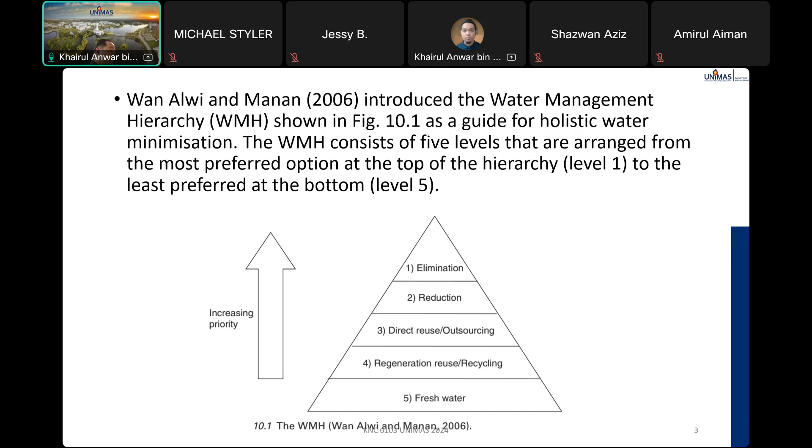The elimination is not to eliminate the water, but to substitute it with something else. For example, instead of using water, we can replace it with air. That means the source, even though source elimination is the ultimate goal, possibly we want to replace water with other type of media. Often it's not possible to eliminate water completely.

So that's why we also have the hierarchy. Attempts should be made to reduce the amount of water at the source of water usage. Such a measure is called source reduction. It's the second best option in the WMH. So we reduce the amount of water usage. To reduce the amount of water usage, that's why we try this method, water analysis.

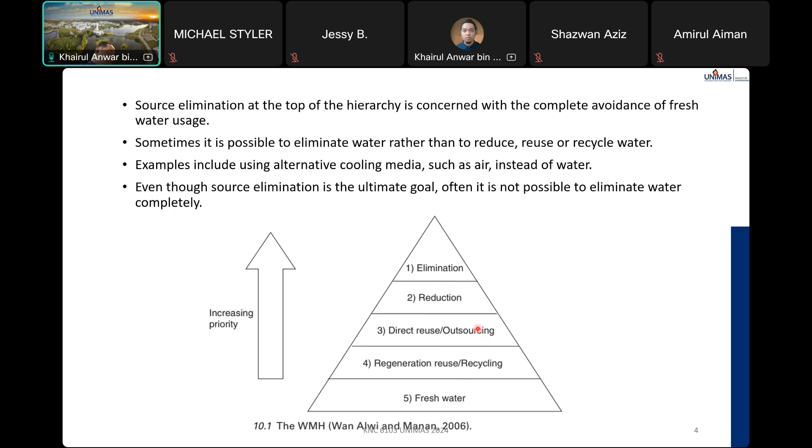Regeneration refers to partial treatment of wastewater or even external water source to match the quality of water required. There are two possible cases for regeneration. We have regeneration recycling, the reuse of treated water in the same equipment or process. If you want to reuse the water again from process one, then you need regeneration recycling.

Regeneration reuse involves reuse of treated water in other equipment. So for regeneration reuse, meaning treat the water from process one, channel it to process two or another process which can accept that contaminated water. How to know the water is enough? When the use is possible for that process. We'll have more discussion, maybe not today. Today we just introduce. So the last level,

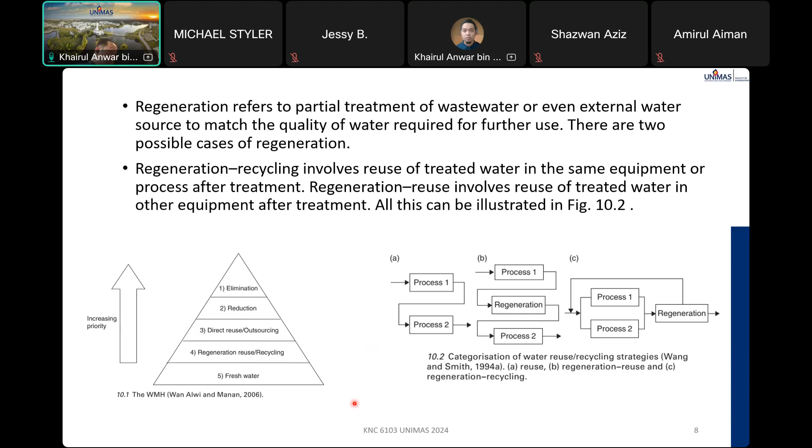fresh water usage, level 5, should only be considered when wastewater cannot be recycled or reused, or when wastewater needs to be diluted to obtain a desired purity. So meaning we mix the contaminated water with fresh water to dilute it, then channel it to another process. The wastewater has to undergo end-of-pipe treatment before discharge to meet the guideline. The use of fresh water is the least desirable option from a water minimization point of view.

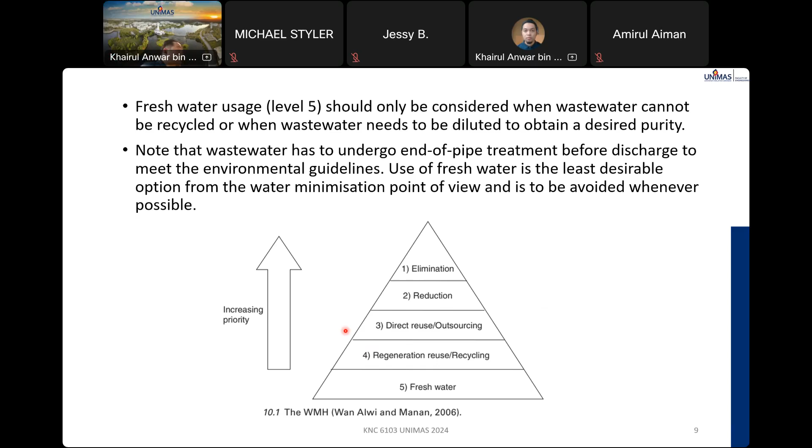So the water footprint concept, and this is related to the pyramid just now of the management hierarchy, expresses the measure of how much fresh water is used during the life cycle of a product. The water footprint consists of elements, page 2 of the paper.

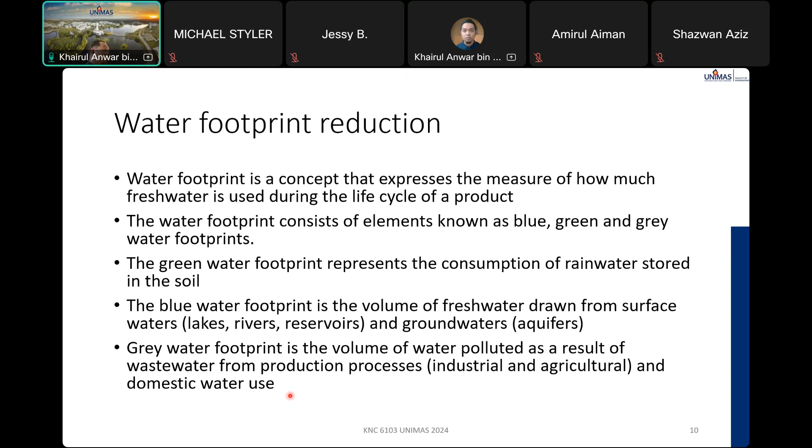This is found in the recent paper. Although their application is for industry, it can be used for other types of industry as well.

And the gray water footprint is using this water flow rate within the facility. So why they choose COD? Because we have many, right? We have pH, COD, yes. They choose COD normally because COD represents the typical contaminant within the wastewater, because wastewater normally consists of many types of contaminant. So one way to look for the contaminant is accounted for by measuring the COD. This one chooses COD.

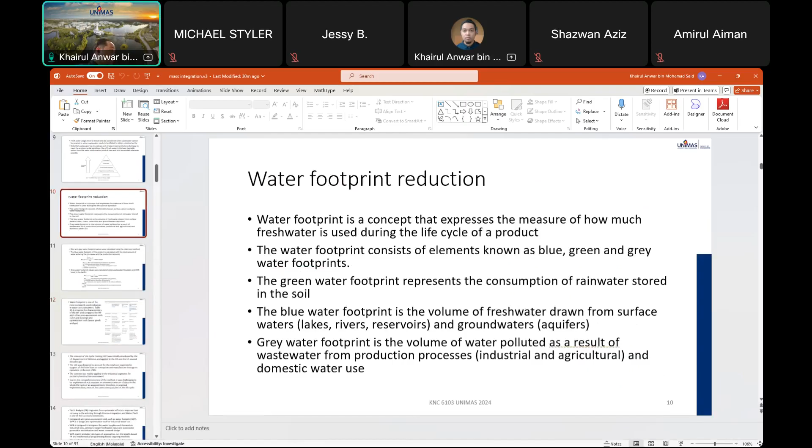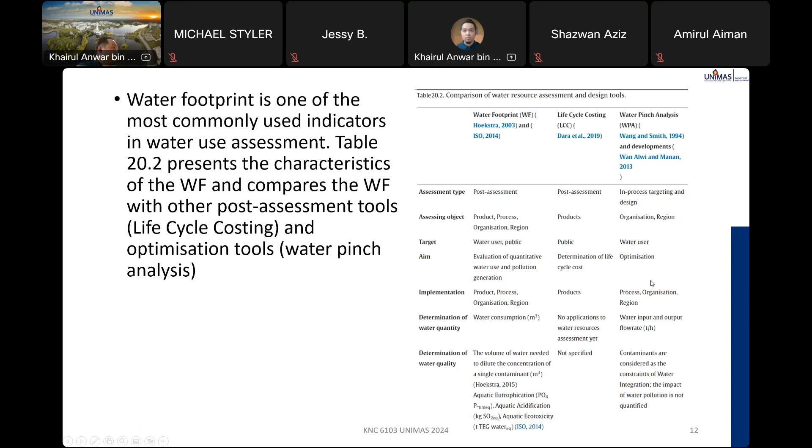Well, this is all the comparison. Go to the book for the complete comparison. The final row should be for limitation. Limitation of water footprint, WF: count only the input and output, not water used within the process.

Life cycle costing, the limitation is it has not been applied to resource assessment. For water pinch analysis, it's challenging to consider multiple contaminants. Yeah. For multiple contaminants it is very hard to do water pinch analysis. Natural water is not considered in there. So the concept is still two.

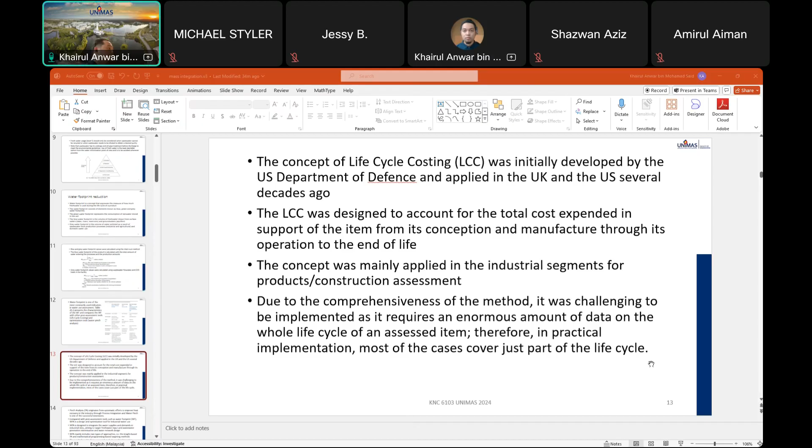The concept of life cycle costing was developed several decades ago, actually in 1981. Life cycle costing at the moment, I think the newest term, they combine it with life cycle analysis. Before that, it's life cycle costing.

So the LCC was designed to account for the total cost expended in support. The concept was mainly applied in the industrial segment. So due to the comprehensiveness, it was challenging to be implemented, requiring continuous data over the life cycle of the assessed item. Therefore, in practical implementation, most of the cases cover just part of it.

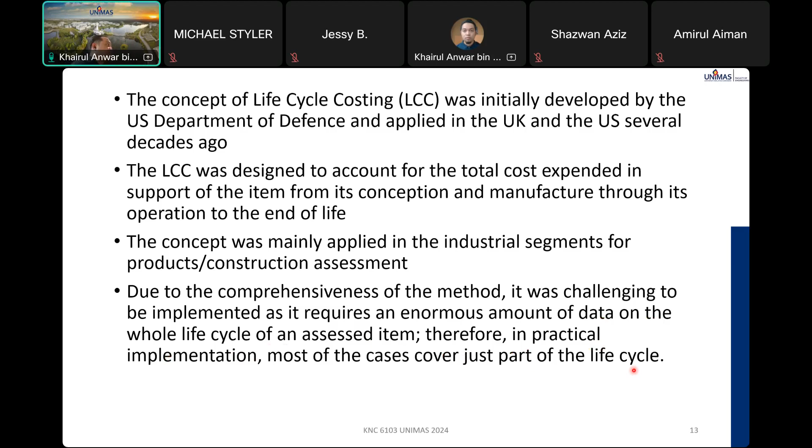This is for pinch analysis. So number 1. Still in book 2, chapter 20. If you have the chapter downloaded, you can refer to page 605.

So pinch analysis originated from systematic efforts to improve recovery in industry through process integration. The first pinch analysis is actually for heat recovery, what our Dr. Farid is discussing. And water pinch is one of the most successful extensions, based on pinch analysis for heat recovery. The person responsible for water pinch, Professor Wang and

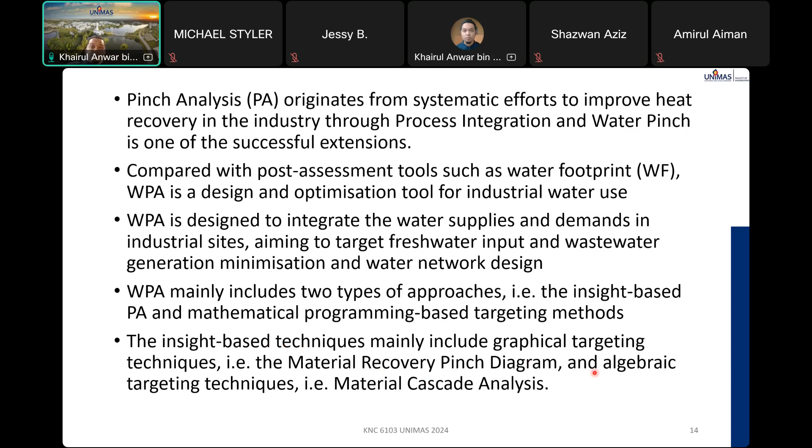The insight-based technique mainly includes graphical targeting technique, this material recovery pinch diagram. Material recovery pinch diagram is developed by Professor El-Halwagi. And algebraic targeting technique, material cascade analysis. Widespread studies have also been conducted on the topic of mathematical programming targeting.

Okay. Now I'm going to page 606. A typical water pinch analysis solution is two steps: setting the water target, followed by network design to achieve the target. So in the work of Wang and Smith, the first paper, it's very long, 26 pages, because they cover single contaminant and multiple contaminant. Although today we cover single contaminant first, we can go for multiple contaminant as well.

In the work of Wang and Smith, the target of using fresh water, maximizing water reuse and water regeneration are discussed, and both single and multiple contaminant are addressed. So a composite curve used to represent the water using process can identify the bottleneck in real processes. And the conceptual framework can help specify the optimal type of regenerator and regenerator specification. So their work serves as one of the earliest contributions of graphical method for water minimization study using WPA.

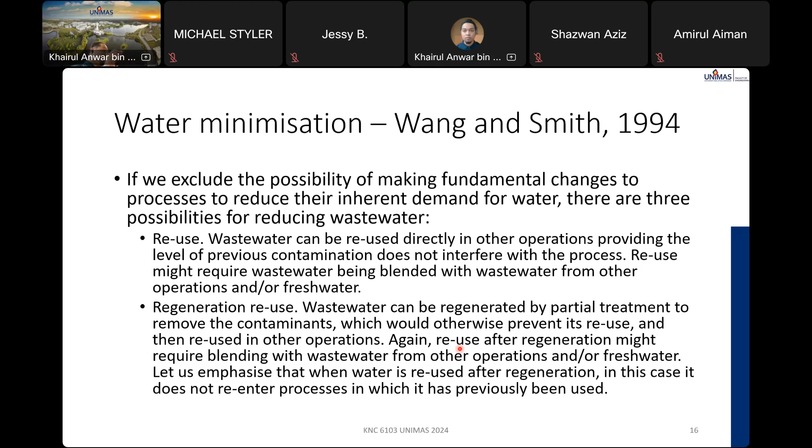So let us emphasize that when water is reused after regeneration, in this case, it does not re-enter processes it has been used in. In order to use the wastewater again for the same process, you need to do regeneration recycling. Wastewater can be regenerated to remove contaminants which have built up, and then the water recycled. In this case, water re-enters processes in which it has previously been used. So it is important to distinguish between these three cases. In some cases, recycling between operations might be allowed. In other cases, it might not be allowed due to the build-up of contaminant not removed in the regeneration.

So how to regenerate it? Method: can filter it, can use membrane to filter, activated carbon, trap, strip.

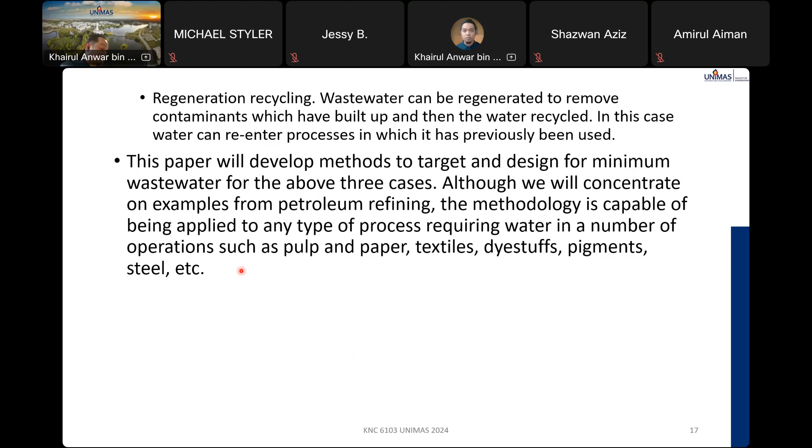This paper referred to Wang and Smith before. So this paper will develop a method to target and design for minimum wastewater for the above three cases. Although we will concentrate on an example from petroleum refining, the methodology is capable of being applied to any type of process requiring water, such as pulp, textile, etc. So when you read this paper, the example is based on petroleum. Still the paper, this is the subchapter, page 982: targeting minimum wastewater for single contaminant. For water pinch analysis, we have five steps.

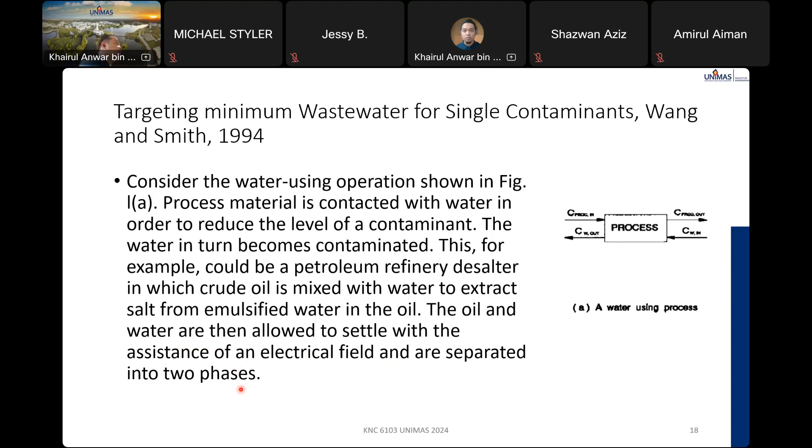Figure 1B shows a representation of this process in terms of concentration of contaminant versus mass of contaminant transfer. In the example of the desalter, let's say it's a desalter, so the contaminant would be salt, because the water will mix with the incoming crude oil plus salt. Contaminant is salt. Figure 1B shows one possible combination of inlet and outlet concentration of water to satisfy the mass requirement. Specifying the inlet and outlet concentration of water and the mass of contaminant transport also specifies the water flow.

So the information here, M is flow rate in kg per hour. Normally either in gram per liter or ppm. So this data is actually from the process or the mass balance.

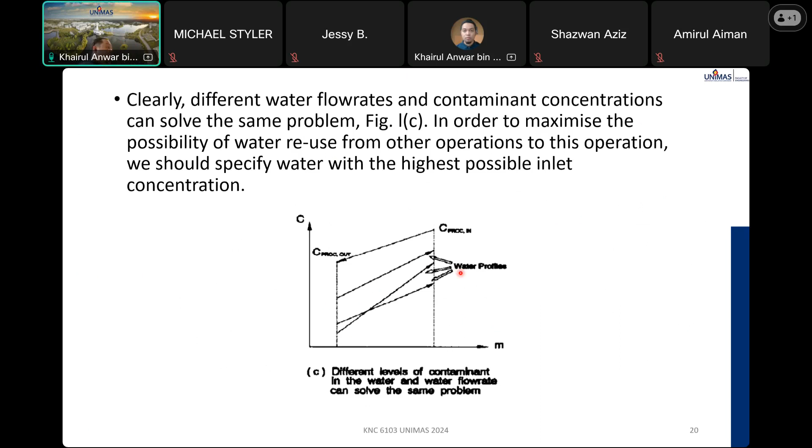This one is page 2 of the paper, second column. Then specifying the maximum possible outlet concentration, minimize the water flow rate at the maximum inlet concentration, figure 1D.

This water profile shown in figure 1D will not necessarily be the profile we will use in the final design. So in this case, we come up with a limiting water profile, meaning this is the minimum water quality for that process. So meaning the incoming water profile must be less than this limiting water profile. It simply represents a limiting case. We will therefore designate this to be the limiting water profile.

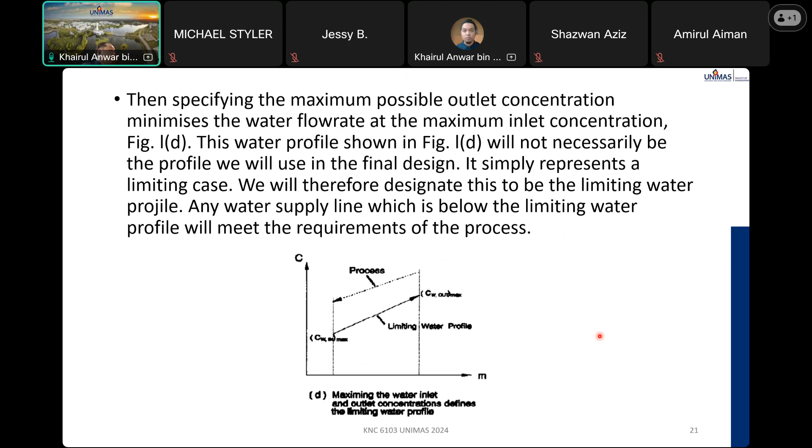So figure 1E shows two examples of different water supply lines which will satisfy the process requirement. In this case, one is fresh water here, below the profile. The second line here is actually from a different process, that's why the inlet concentration is contaminated, but still below the threshold. So the threshold here is the limiting water profile.

So how to determine the limiting water profile? That one we need to do the pinch analysis. The maximum inlet and outlet concentration for the limiting water profile will be fixed by a number of possible considerations.

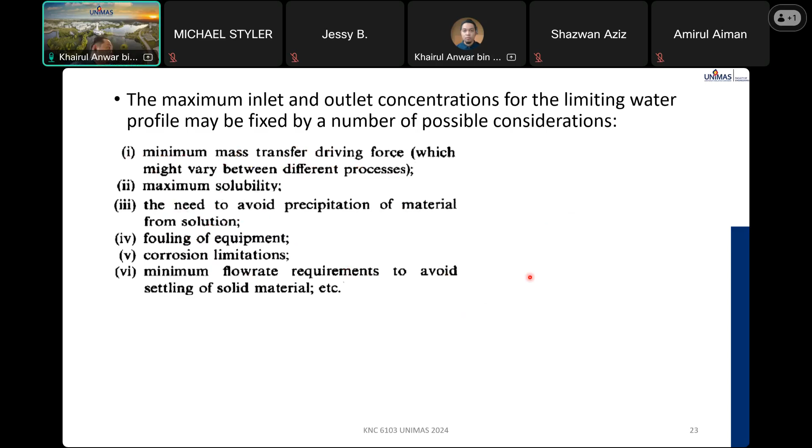So in the same paper, the author provides an example of limiting composite curve, how to determine the pinch point. Page 3.

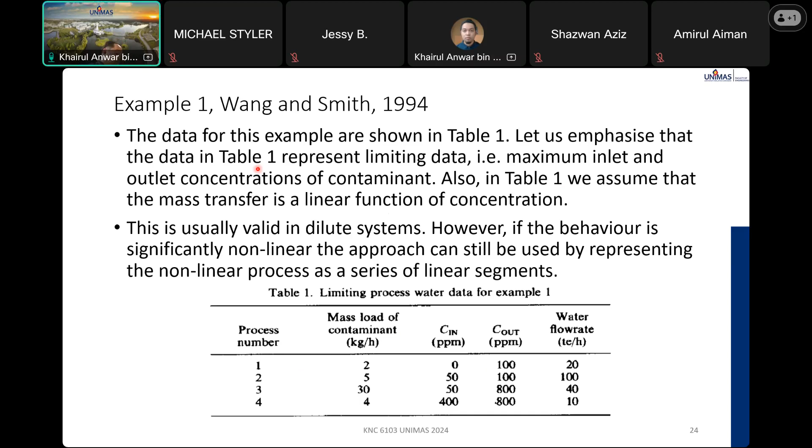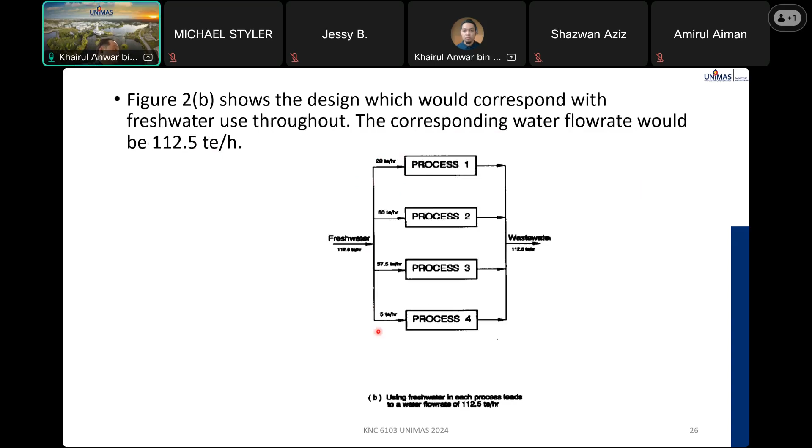So this one is 50 divided by 800 times 40, then 40 minus that value. 50 over 800 times 40 is 2.5. So 40 minus 2.5 is 37.5.

The freshwater usage is 112.5 ton per hour. This is before water pinch.

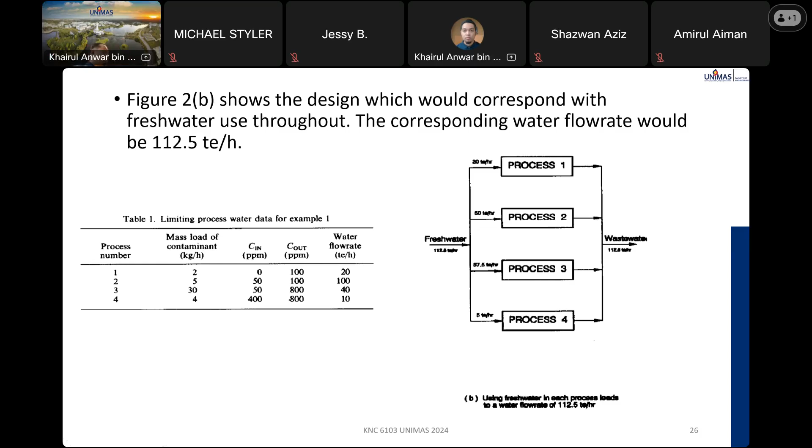Page 4, paper number 1, is the pinch.

We are to minimize the flow rate overall, must analyze using processes behave in an overall sense. For this, we can construct a limiting composite curve as shown in figure 3. This is a limiting composite curve.

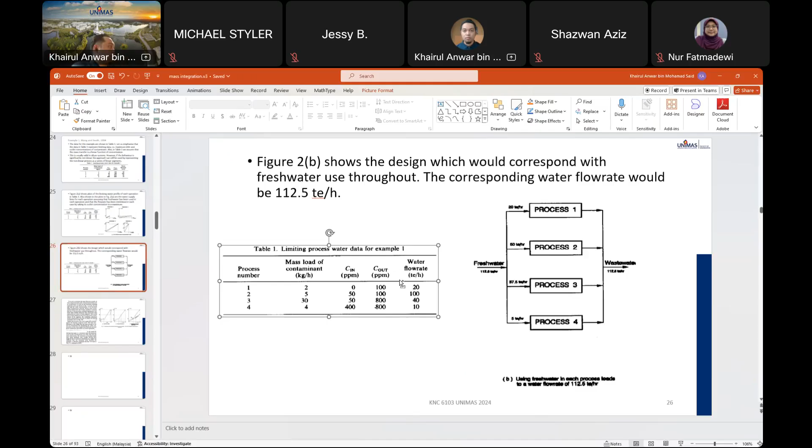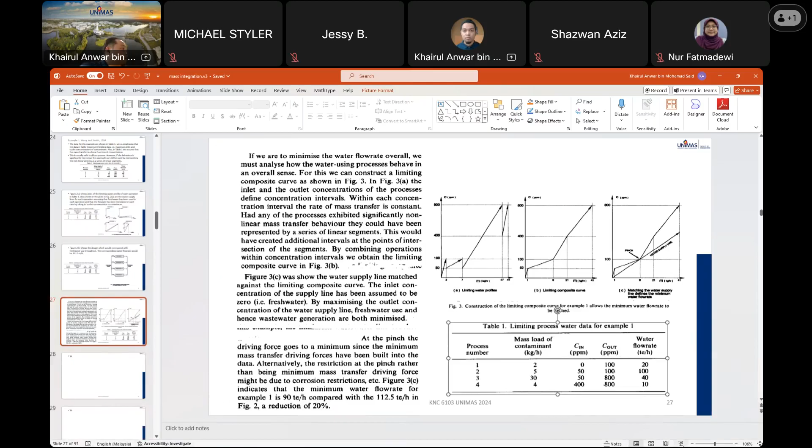So how did they come up with 90 ton per hour here? They don't show the calculation for this line.

Calculate the ppm. It's similar to percentage. For percentage, the number is divided per 100. So ppm is per 1 million, that's why it's called parts per million.

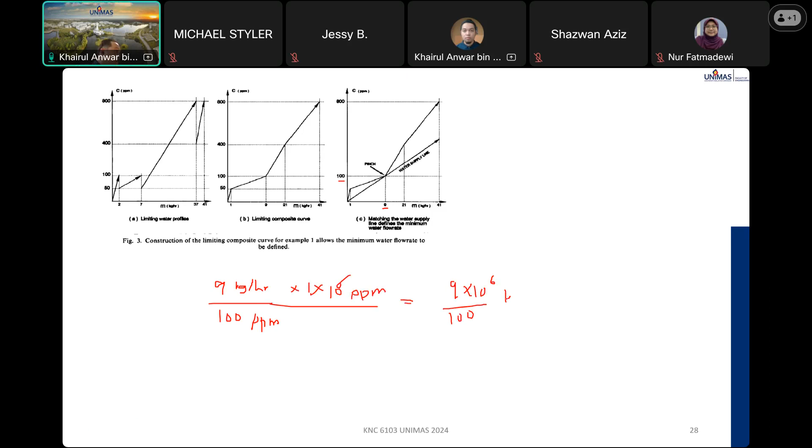Change this kg per hour to ton per hour. That's why they get 90, they get ton per hour. Nine times 10 to the 6, divided by 100.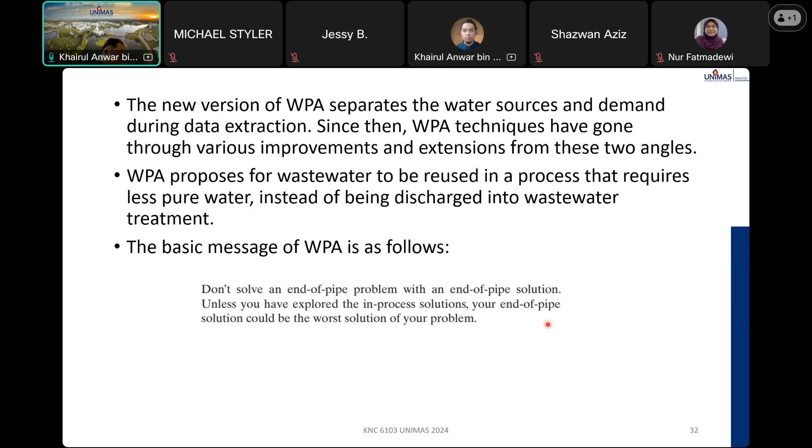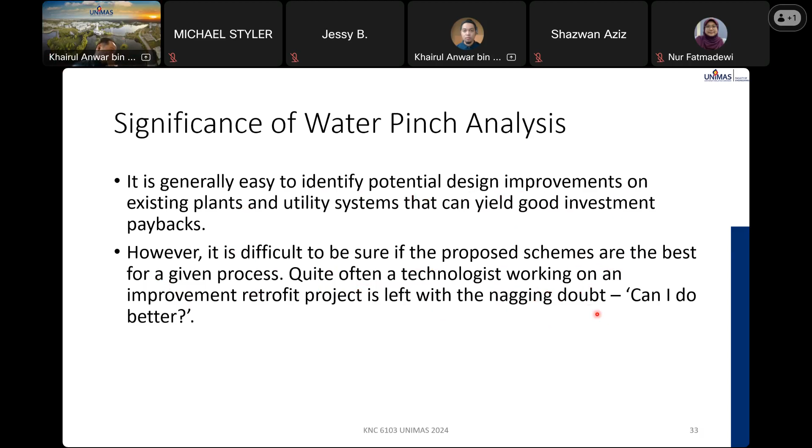Can I do better? But until today, progress made in process design has largely been developed based on the learning curve. This figure analyzes success factor with the design target.

So Linnhoff 1986 is referred to as the first pinch analysis, based on heat recovery by Linnhoff and Flower in 1978. Linnhoff then in 1986 came up with this: cost saving over time, based on past design feats. This is a design/retrofit based on past performance.

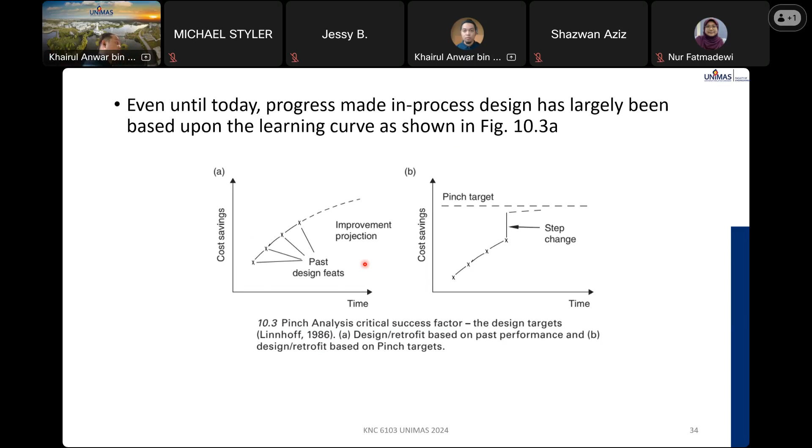Technologists would typically use a previous achievement, the specific water consumption of a similar plant elsewhere, as a benchmark for improvement. Such a benchmark can be referred to as an apparent target, since any improvement is only relative to the previous design achievement. So this statement refers to figure 10.3a. It is not significantly improved actually over the past design.

See, a true minimum target should be based on the specific structure, operating conditions, and thermodynamics of the plant undergoing retrofit instead of on the performance of a similar plant elsewhere. This is where pinch analysis has a key advantage. It has been proven useful in representing the overall system water quality and quantity and in noting the true water target.

So with the notion of a true minimum design target made available through pinch analysis, a technologist would be less likely to settle for a marginal improvement. So they do the pinch analysis to get the step change. They won't settle for the marginal improvement and would strive to achieve the true minimum, hence the step change in improvement. So that one is figure 10.3b. That's why we do pinch analysis.

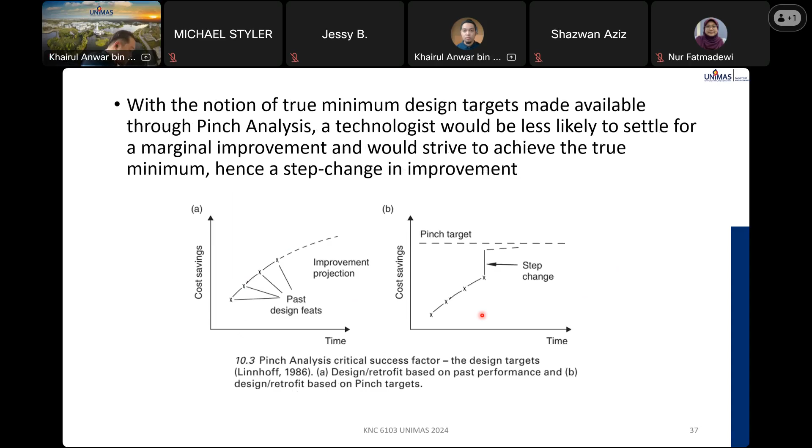Pinch analysis for energy and carbon footprint reduction. And based on the third book, Pinch Analysis for Energy and Carbon Footprint Reduction, page 3: water, hydrogen, and carbon pinch analysis. The steps in mass pinch analysis.

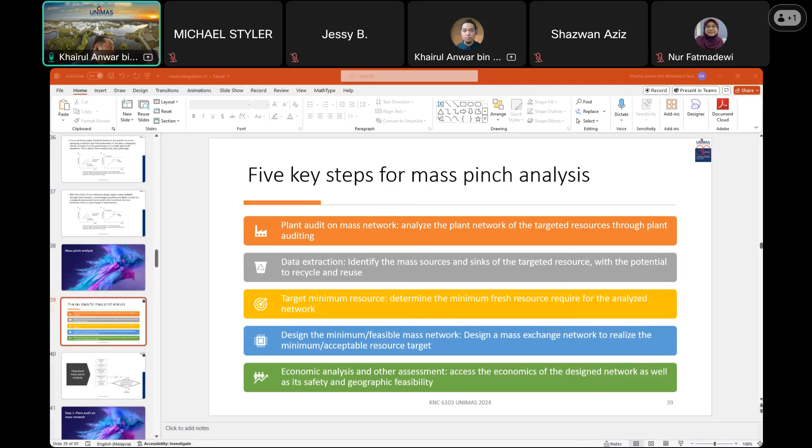Last is economic evaluation. The final step is to evaluate the economics of the water network. But economic evaluation, I think that one is, check, it's covered by Dr. Asrul. Yeah, see, process economics, covered by Dr. Asrul in July. It's actually part of the water pinch analysis. Okay.

Flowchart of mass pinch analysis. For this flowchart you need to refer to book number 3, page 355, chapter 9, figure 9.3. Actually, it is based on the 5 steps of pinch analysis. So you start with network analysis, mass network analysis, water network analysis for our case. Extract the data, target the minimum utility, and then you design or retrofit it. The last one is the economics.

So from here, you create a loop. If you have acceptable criteria for the design with safety and operational constraints, so all this is okay, it becomes your final design. Otherwise, you need to return back to the step.

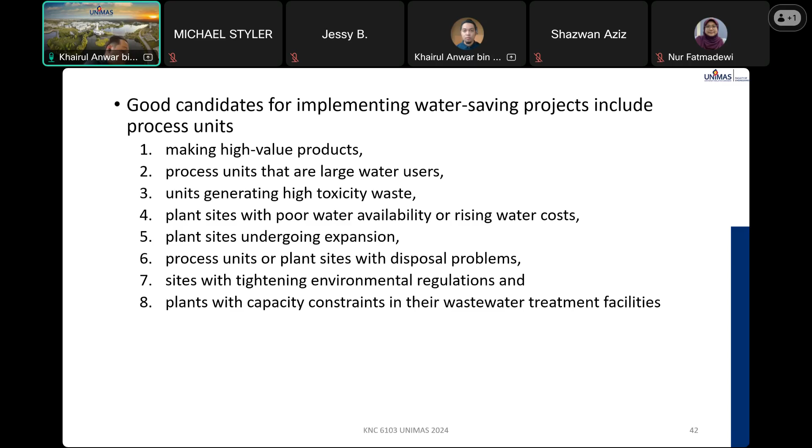report. Note that general water using operations can be classified into two main categories. This is still step one. Okay. Still in step one. So water using operations can be classified into two main categories. We have mass transfer based, MTB, and non-mass transfer based, NMTB.

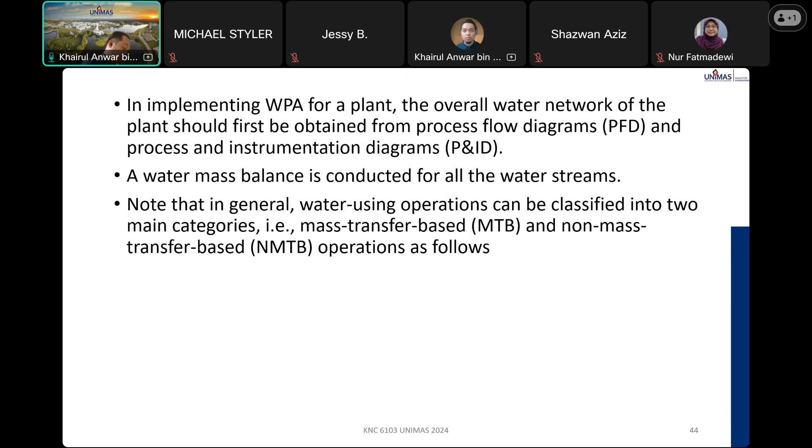So mass transfer based operation, refer to page 359. An MTB water using operation is characterized by the preferential transfer of species from a rich stream to water, which is being utilized as a lean stream, or MSA. MSA refers to mass separating agent. So if you're using water to dilute the contaminant, your water is the MSA, or mass separating agent.

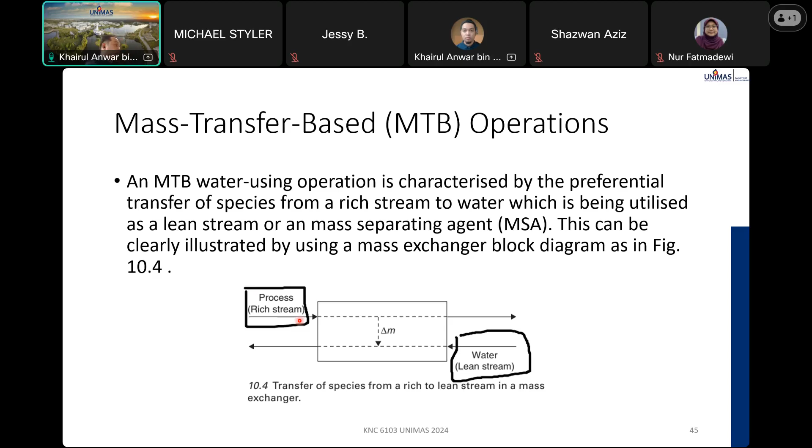For an absorption process, water is the MSA used to remove contaminants such as H2S and SO2. As the name says, mass transfer based operation, mass transfer. Note that the input and output flow rates of the mass transfer process are assumed to be the same, since this type of operation is also known as a fixed flow rate problem.

Okay, next is non-mass transfer based operation, still step 1. An NMTB water using operation covers functions of water other than MSA, mass separating agent. An example of such an operation is water being utilized as a heating or cooling medium where there is no mass transfer involved. For such operations, sometimes only a water sink or water source exists.

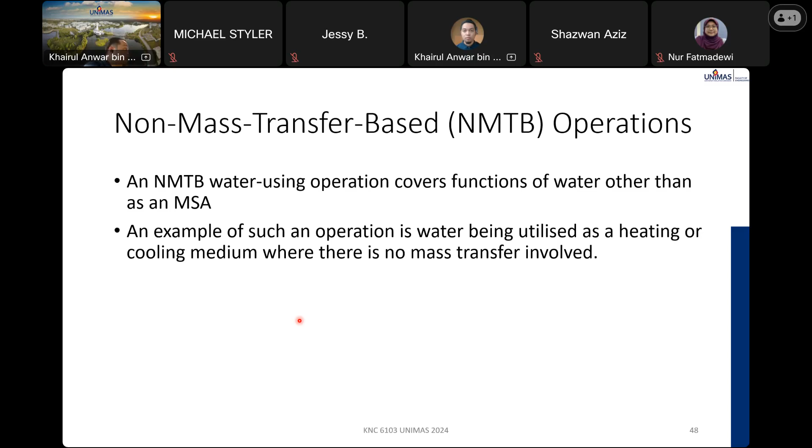Shown in figure 10.6, water goes into the system but is lost as it evaporates. So for this, which one? 10.6 here. So water goes to the cooling tower. There's no water coming out because it turned to vapor. Similar to a boiler. So water goes to the system but is lost as it evaporates in figure 10.6a.

For figure 10.6b, water is generated from the condensation of steam from the boiler. Another example is cases where water is being fed in as a raw material, for example, 10.7 there. Water as a heating or cooling medium or as a raw material fed into a reactor is not intended to preferentially transfer species within streams, hence it clearly represents non-mass transfer operation.

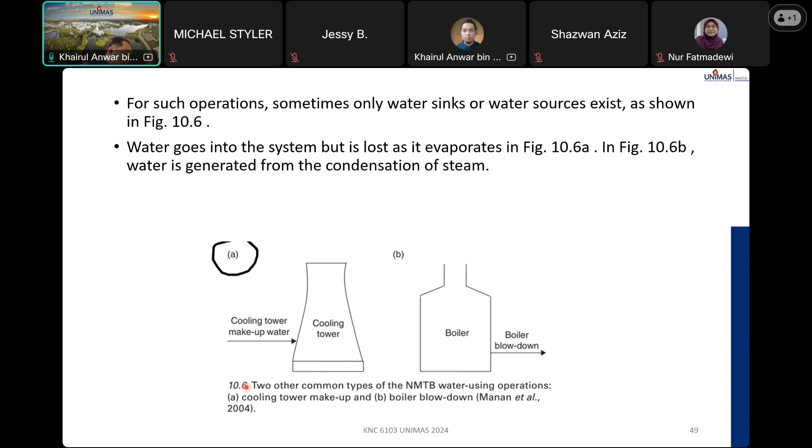Note that water flow rate is more important than the amount of contaminant accumulated for an NMTB, non-mass transfer based water using operation. For this reason, an NMTB process can have different inlet and outlet flow rates. The NMTB version is also known as a fixed contaminant load problem. Better.

So MTB, mass transfer based, is also known as a fixed flow rate problem. NMTB, non-mass transfer based operation, is also known as fixed contaminant load. Note that water source and sink streams having the potential to be reused need to be identified.

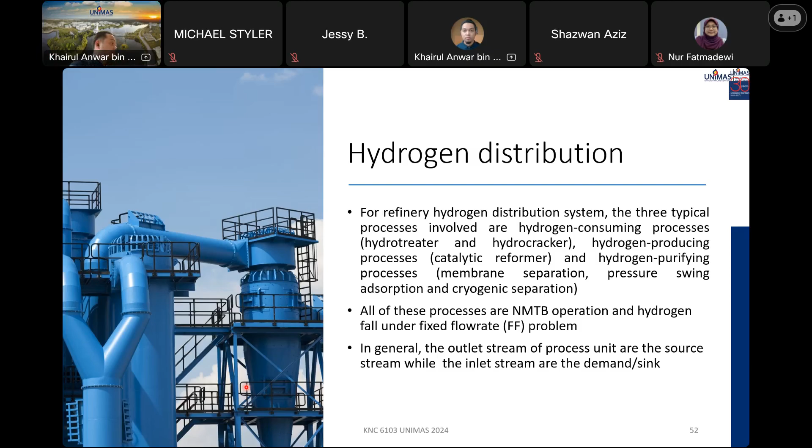So in general, the outlet streams of the process units are the source streams, whereas the inlet streams are the demand or sink. Okay, this is similar to heat integration. The output product tends to be heat source, heat sink, both. Step 2, data extraction.

So after analyzing the water network, the MTB and non-MTB water processes are grouped into plant sections. Processes chosen are preferably close geographically in the plant. Location is close. Also chemically related. The process needs that chemical. The main contaminants that prevent direct reuse in the water system are chosen.

The system can be modeled either as a single contaminant or a multiple contaminant approach based on the water quality of the plant process. However, the problem of multiple contaminants involves complex modeling procedures and relies on mathematical modeling and optimization techniques. So an alternative is the use of aggregated contaminants such as solids, oxygen demand, TDS, that allow multiple quality factors to be modeled in a single contaminant approach.

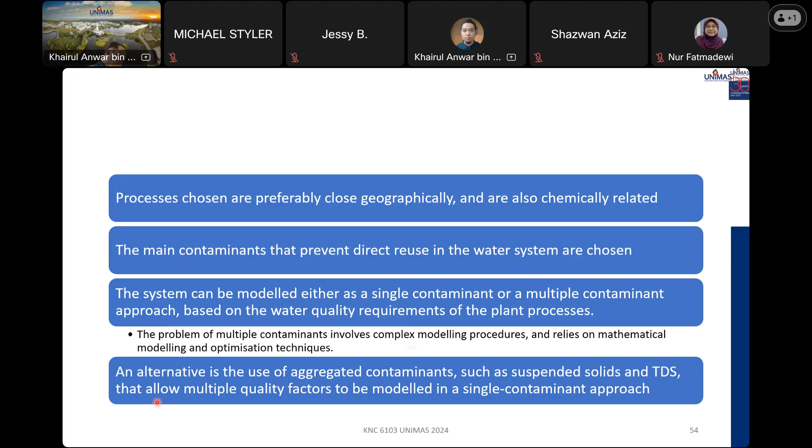Step 3 is setting the minimum utility. So first, setting the minimum utility target. We have many methods. One I show you, limiting composite curve. So in Handbook of Process Integration, chapter 10 here, refer to page 261.

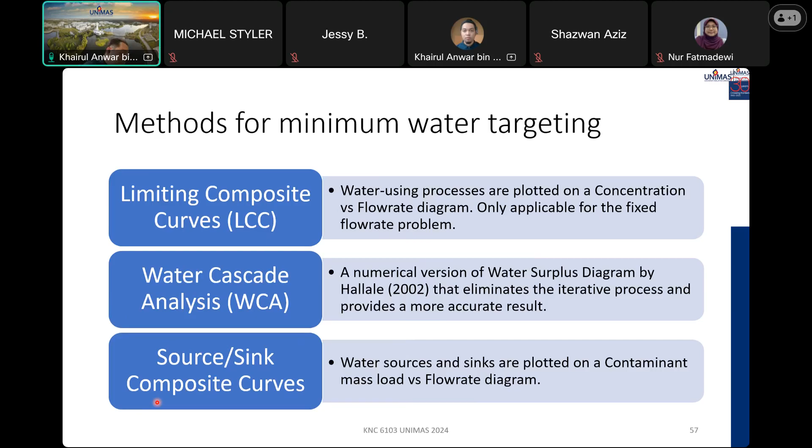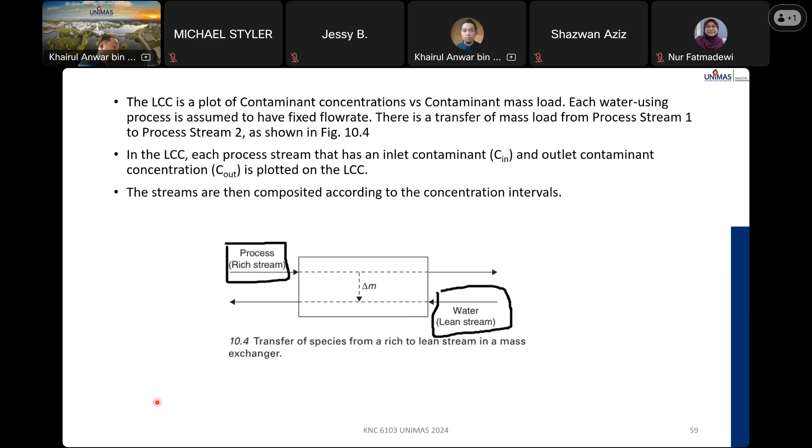The LCC is a plot of contaminant concentration versus contaminant mass load. Each water using process is assumed to have fixed flow rate. There is a transfer of mass load from process stream 1 to process stream 2 from figure 10.4. In the LCC, each process stream has an inlet and outlet contaminant concentration. This is a similar graph plotted on the LCC. LCC is limiting composite curve.

The streams are then composited according to the concentration interval. The limiting fresh water supply line is drawn starting from zero because it's fresh water, and mass load with a slope that just touches the composite curve at one point here. The water supply line has to be located below the composite curve, with the minimum flow rate target for the system. The supply line touches at the pinch point.

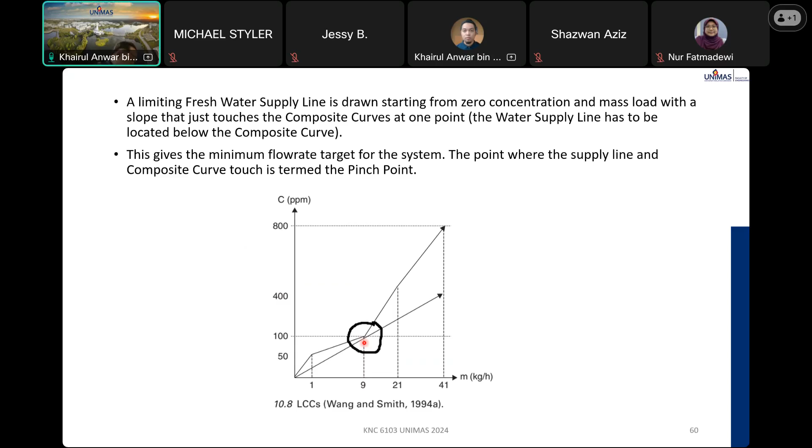Water cascade analysis. This is page 363 in book 1. The WCA, water cascade analysis, is a numerical targeting method with the aim of establishing the minimum water target, the overall freshwater requirement and wastewater generation for a process after looking at the possibility of using available water sources within the process to meet its water sinks. So to achieve this objective, the net water flow rate, water surplus, and deficit at different water purity levels within the process under study have to be established.

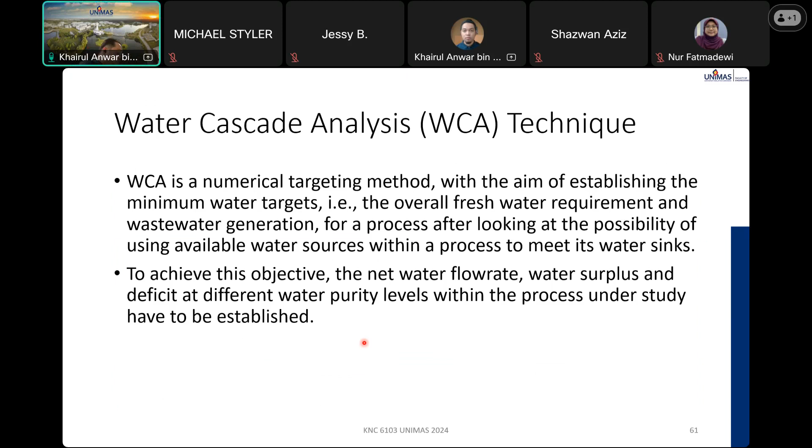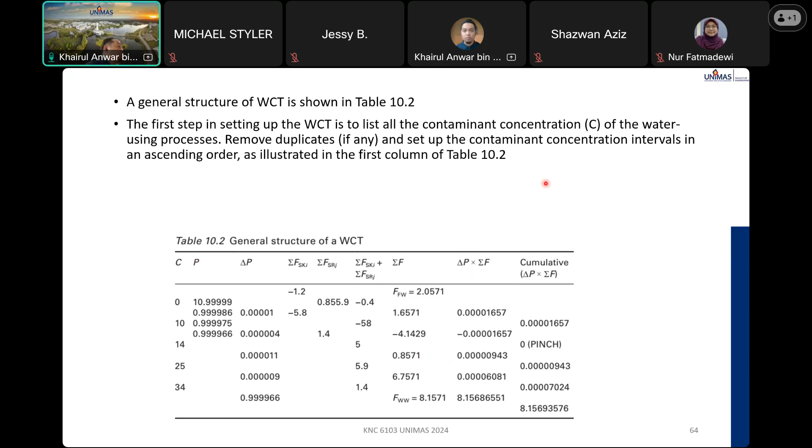Next, the purity P of each contaminant concentration, column 2, is calculated, as the concentration of pure water is 1 million ppm. Water purity of a contaminated stream is defined as P equal to 1 million minus C over 1 million. So C here equals the contaminant concentration in ppm. That is how you get this column.

So 0.99 here refers to C10, 0.9986 refers to 14. This one refers to here. P is in between 0 to concentration. Could be.

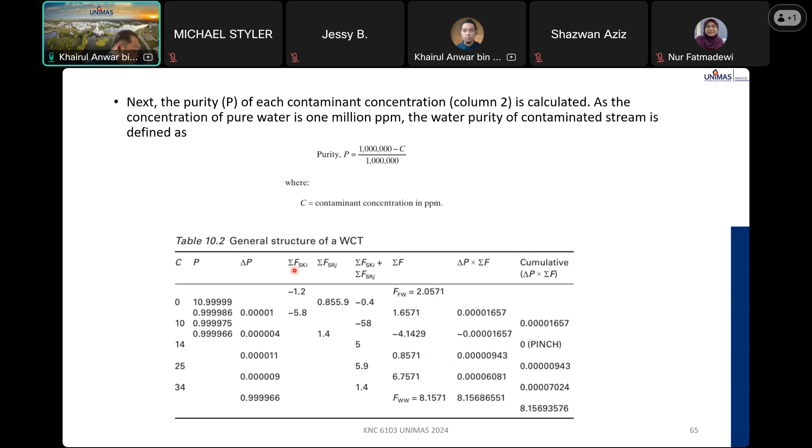The flow rates of all water sinks, FSK, and sources, FSR, are summed at each purity level in column FSK, FSR respectively. For simplicity, all summations will be presented by summation in the following text. Note that water sinks are written as negative values while sources are positive. Source is the wastewater, the sink is the fresh water.

The water sink. So I found you the paper by Manan. How many steps? For water cascade analysis, you have 9 steps, referring to each column of the water cascade table. The fifth step refers to the fifth column.

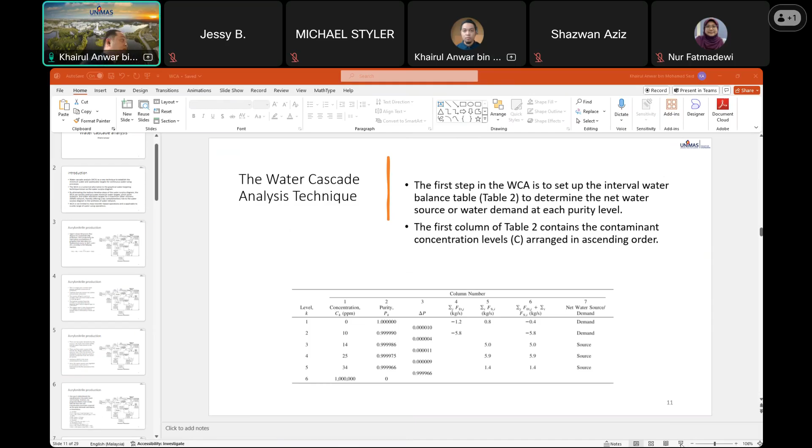This table is in the Handbook of Process Integration, Book 1. So this type is based on the 2004 paper by Manan et al. The water cascade analysis, systematic first step.

The first step in the WCA is to set up the interval water balance table to determine the net water source or water demand. Okay. The first column of Table 2 is the contaminant concentration, set in order. Then, so 1 million here, as the concentration of pure water is 1 million ppm.

The water quality of the contaminant stream is defined as... so 1 million here is the pure water. I will say this is the contaminant in water. This concentration level is expressed in terms of the water purity, second column. With the concentration of pure water set at 1 million, the fraction of the water in the contaminated stream, the water purity, can be expressed as P equal to 1 million minus C over 1 million. It's similar to the Handbook of Process Integration, chapter 10.

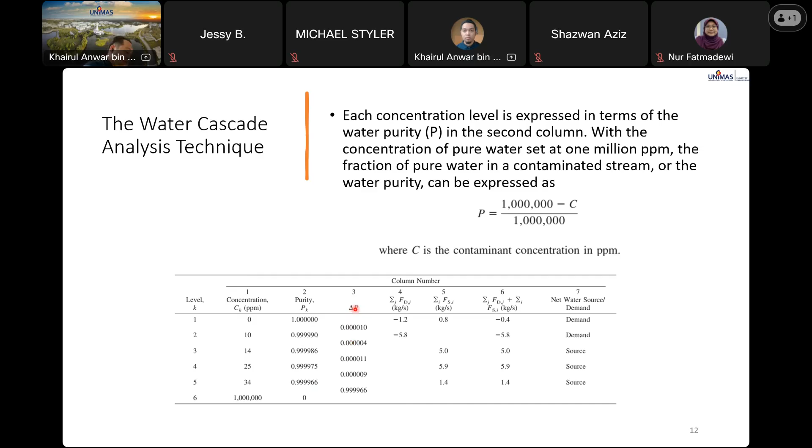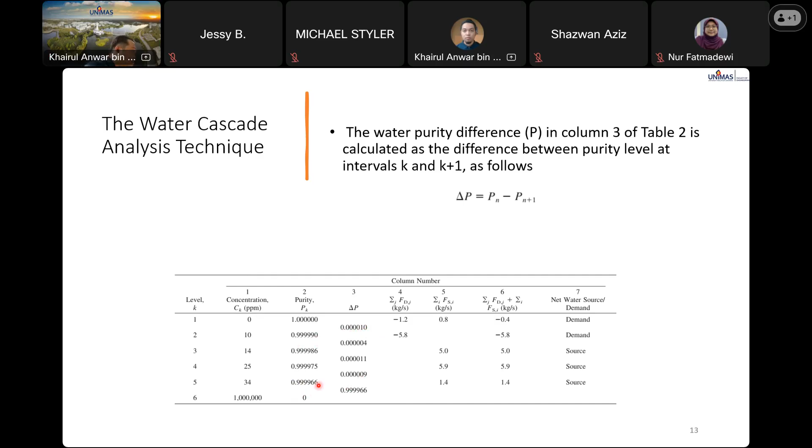But the water purity difference, delta P in column 3 of Table 2, is calculated as the difference between purity levels K and K plus 1 as follows. So the purity difference here refers to in between the levels, between the concentrations. So 1 minus 0.99990 is equal to 0.000010, and 0.99966 minus 0. So we get this number.

This is the water cascade. We are still in step 3. So step 3 we have 6 methods. First one is a composite curve, which I mentioned to you. Now is the water cascade analysis developed by Prof. Zainuddin of UTM.

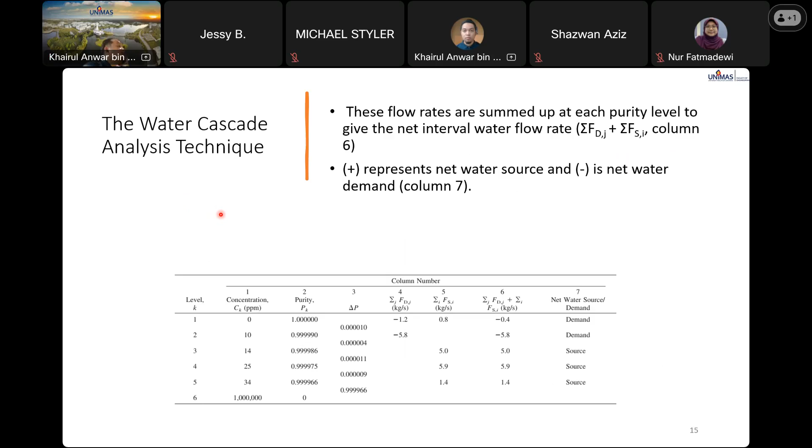The water cascade analysis technique: once you get this, you can plot the water cascade now. So each purity level, and FW. So fresh water at the moment is 0. FW for fresh water. The first one is negative 0.4. We get the negative from column number 6. Second purity level, negative 5.8, and so on.

Delta P is the purity difference. Then net water source or demand, FC: zero minus 0.4, negative 0.4, negative 0.4 minus 5.8, negative 6.2, negative 6.2 plus 5, negative 1.2, negative 1.2 plus 5.9, 4.7, 4.7 plus 1.4, 6.1. So wastewater produced is 6.1 kilogram per second.

That one is for Figure 10A, the water cascade with an assumed freshwater flow rate of 0 kg per second. So B here, the pure water cascade, is used to check the feasibility of the water cascade. So 0.4 times delta P, you get 0.000004 kilogram per second. Okay. Pure water surplus or deficit, that is the interval.

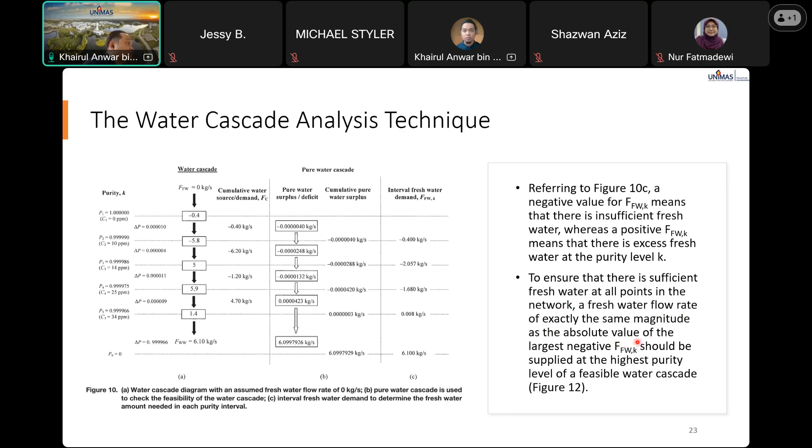To ensure that there is sufficient fresh water at all points in the network, a freshwater flow rate of exactly the same magnitude as the absolute value of the largest negative FWK, this one, negative 2.057 kilogram per second, should be supplied at the highest purity level of the feasible water cascade.

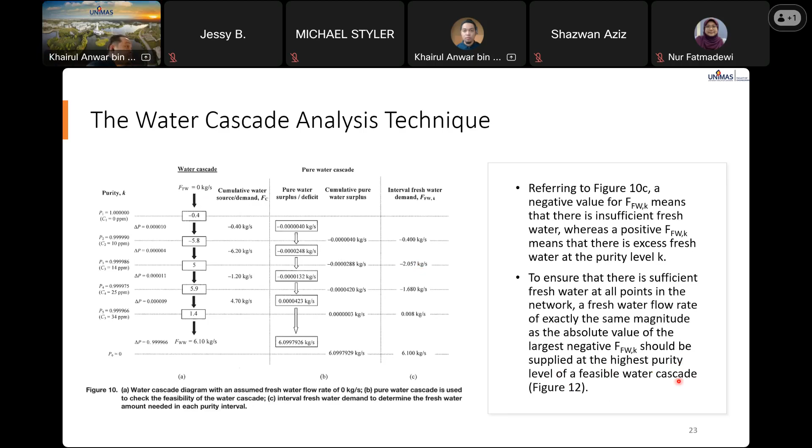Figure 12. So 2.057, the term here, the highest purity level of feasible water cascade, means to supply fresh water.

Do the water cascade again, but now the freshwater is included based on the highest cumulative pure water surplus. Use that number as reference for FW, fresh water; it automatically becomes the pinch of this process.

So the FW value of 2.057 kg per second found at the third purity level P3 in figure 10C has the largest negative value. This quantity gives the highest level, the feasible water cascade. Note that a feasible water cascade is one that results in positive or at least zero cumulative pure water surplus in the pure water cascade.

To recalculate, this still refers to the water cascade table. The only difference is the cumulative water source or demand FC: 2.057 minus 0.4 gets 1.657, minus 5.8 gets negative 4.143.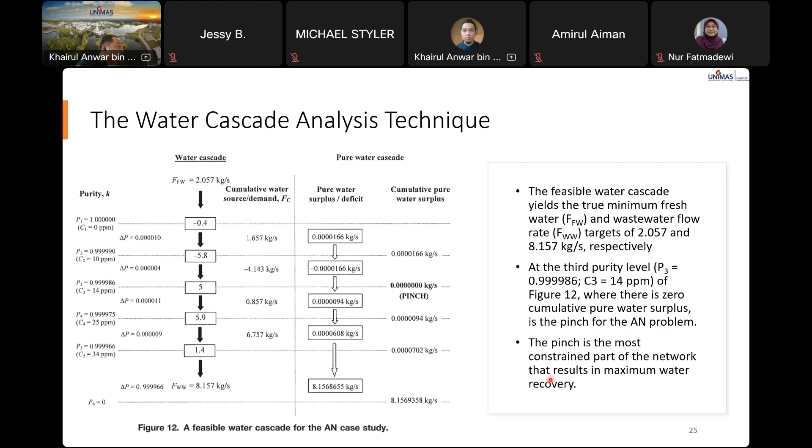AN problem. AN here refers to acetonitrile. This is based on the acetonitrile process. The pinch is the most constrained part of the network, representing maximum recovery.

Through the WCA, we have obtained the utility target ahead of design and are able to verify whether the proposed solution design is achieved.

Water cascade and pure water surplus cascade diagram form the water cascade table in table 3. This table is the final table. Oh, it's the pinch.

So the purpose of doing a lot of explanation is to determine the pinch. Any method you can use, limiting composite, the outcome will be the same pinch point, although the accuracy wise, that one is dependent.

If you use water cascade analysis, at the end you can get the minimum utility target. Once you get the minimum utility target, then you can go for step 4 to design the network.

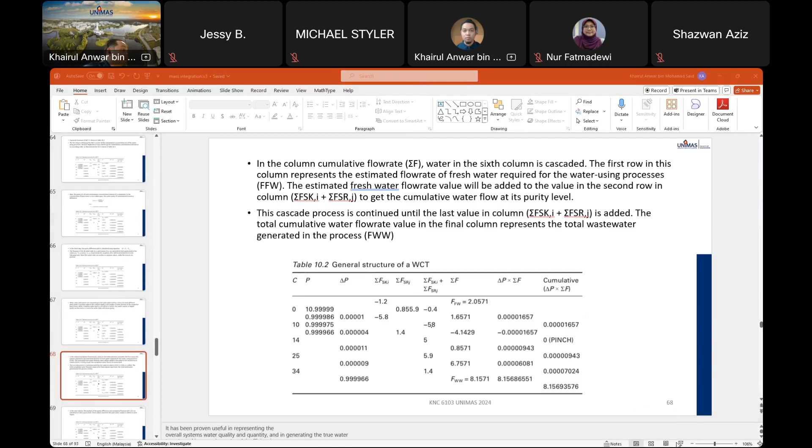Third method is source-sink composite curve. The source-sink composite curve is used to target the minimum usage of fresh resources.

Second is network, but this step is for constructing the water system. Rank the stream in ascending order of the global contaminant concentration.

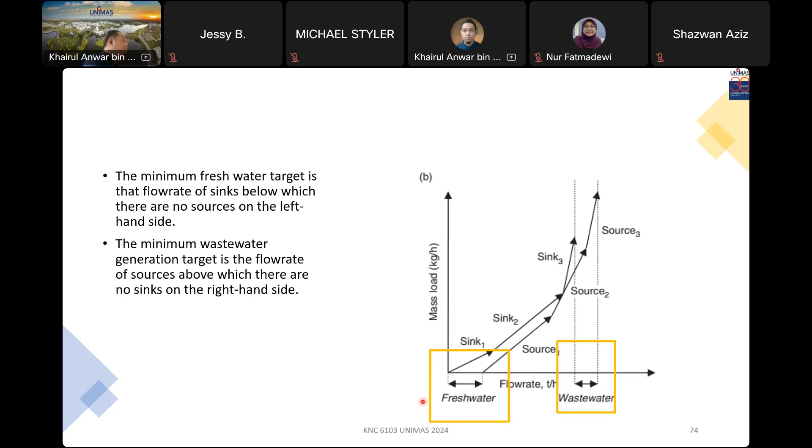So after targeting, the next step is to consider process modification. Process modifications are changes made to the individual water-using operations to modify either the flow rate or concentration of the water sources or sinks.

The appropriate step to modify a process depends on the location of the process relative to the pinch point of the system. The process will be above the pinch, below the pinch, or at the pinch point. This is for the sink source composite curve.

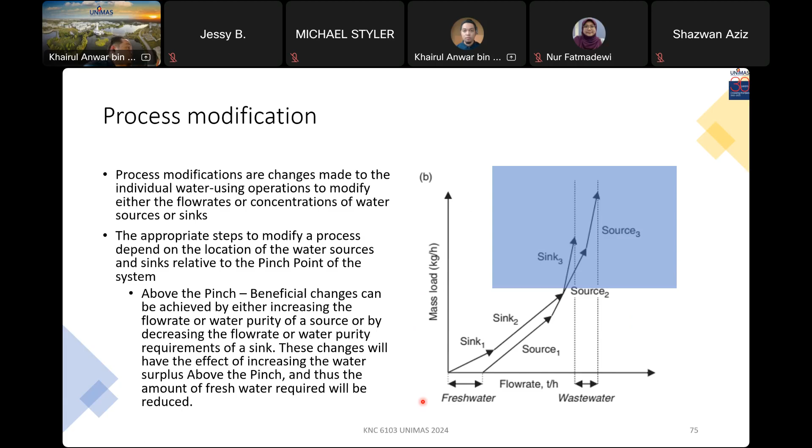Exception to this rule of thumb is the case where the source is in the region above the pinch; this is the case of regeneration. This is above the pinch, suppose the pinch happens here. This is below the pinch and at the pinch. At the pinch, increasing the flow rate of source at the pinch actually does not affect the target.

So we continue with step 4, after network design and targeting.